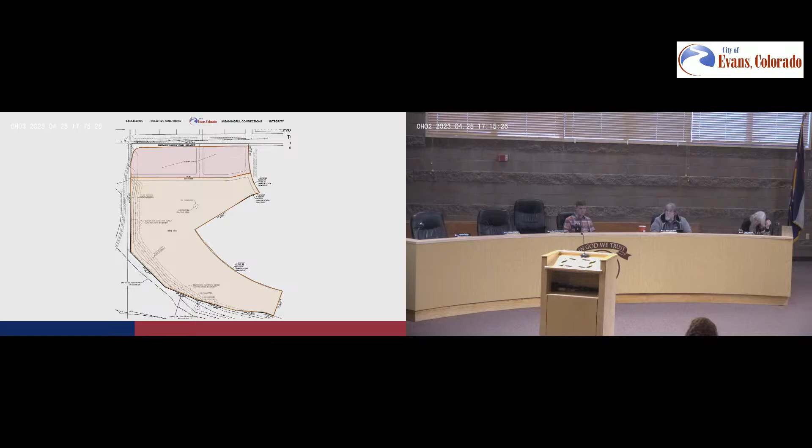The applicant has most recently completed a townhouse development in Greeley, just south of Center Place and west of Greeley West High School, which is shown in concept here to get an idea of some of the things that they have done.

There are 9 review criteria for a zoning amendment. The first one is that a need exists for the proposal. Obviously, or at least obviously to the landowner, the way it's zoned right now has not been working, and so they would like to change that. Let me get this other thing up here.

The next criteria, here I shortened them. The next criteria says the particular parcel of ground is indeed the correct site for the proposed development. The future land use map designates this area for commercial and residential urban neighborhood uses, so it's pretty mixed. As staff, we feel that this is in line with the proposed C3 and R3 uses.

The next two criteria go together, that there's an error in the original zoning or there have been significant changes to the area that warrant a change of zone. The original zoning does not match the market demand for development.

Also, residential development can better benefit from the direct access to the Ashcroft Draw Trail and the associated open space around it. Criteria number 5: adequate circulation exists and traffic movement would not be impeded by development.

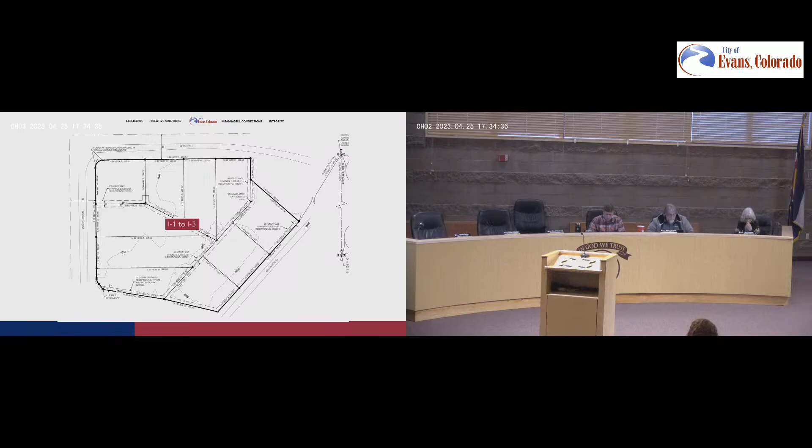Number 6 is that additional municipal service costs will not be incurred, which the city is not prepared to meet. The zoning amendment will not cause any additional municipal service costs to the city.

Number 7, there are minimal environmental impacts, or those impacts will be mitigated. The site plan and special use permit processes associated with this change of zone did in fact include a review and mitigation of environmental impacts, including the placement of a rain garden, enclosing the milk depackaging processing, and address a lot of those concerns. So there's not a concern with this change of zone.

Number 8, the proposal is consistent with the comprehensive plan.

The application furthers several principles. It helps our local businesses expand and gives them the best opportunity for long-term success, which is one of our comprehensive plan goals. Another goal says we want to value our agricultural resources and support those important industries into the future. This is an agricultural support service industry, so we would want to support that based on our master plan. And number 9, there is adequate waste and sewage disposal, water, schools, parks, and all those other things.

The site is served by municipal water and sanitary sewer. Stormwater will flow to a regional detention pond, and there are no impacts to schools or parks.

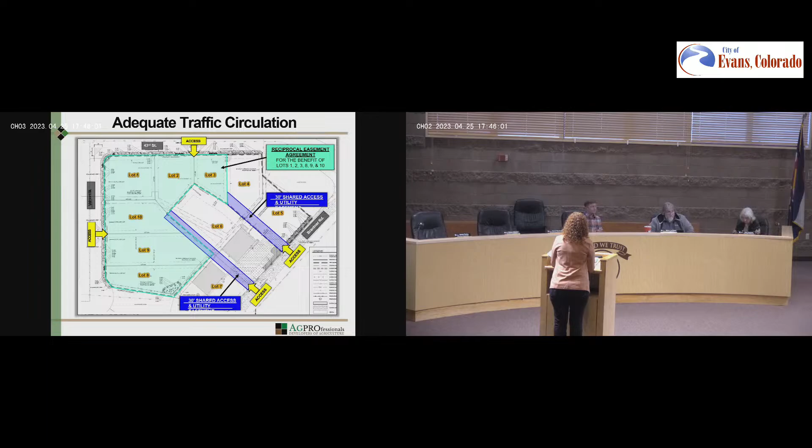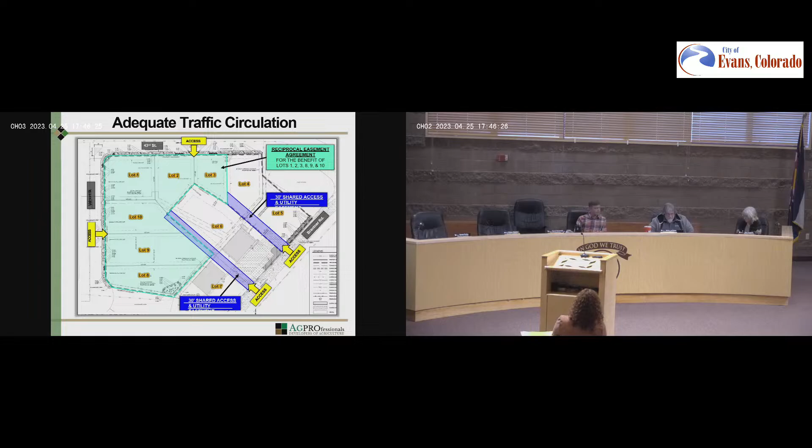We are ready for public comment. Is there anyone in the audience that would like to address this? No? Okay. Public testimony is now closed. There's nothing to rebut, so staff, any further questions or comments? No. Planning commissioners will now discuss this.

So upon hearing more about this and understanding it a little bit better, is it all right if I ask Angela a few more questions before we discuss it? Absolutely. So this seems like it's being called a recycling facility, but they're not really recycling.

They're not recycling according to the state's definition of recycling. They're recycling according to the City of Evans' definition, which is how the direction at the time was to do the special use permit. The City of Evans definition, which is in my presentation for the next item on the agenda, has that definition for you, and it's very broad. It says crushing, separating, taking something in and redistributing it. It's pretty broad, so I can see why previous administration directed the applicant that it was a recycling center. I also see that it's minor in nature and could see why someone might think it wasn't. I do see how it fits into that definition and why they were asked to do a special use permit application.

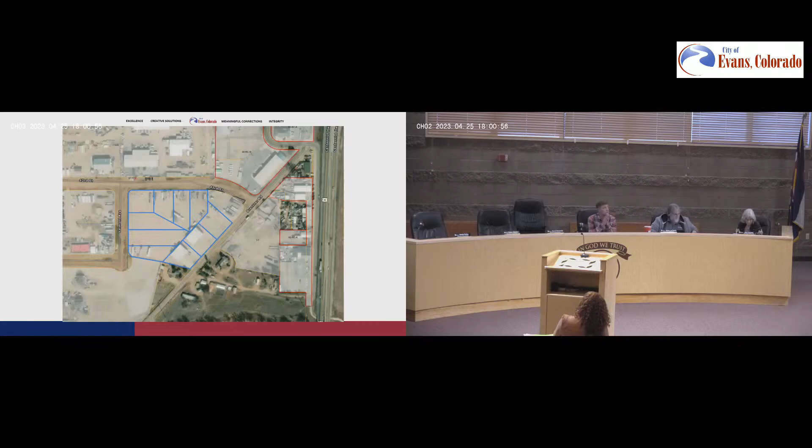For the office parking. So a recycling center, according to our code, means a use involving the collection and processing of recyclable materials for shipment or reuse - baling, compacting, flattening, grinding, crushing, mechanical sorting, shredding, melting, cleaning, and remanufacturing.

A recycling center is only allowed in the I3 zone district and requires a special use permit, which is why this request is before you today, as they were directed back in 2021.

There are 7 criteria for special approval of a special use permit, and some of their definitions are long, so I shortened them. The first one is health, safety, and welfare.

We believe the development standards in our review take this into account, such as MS4 providing for the health, making sure that all of any milk that doesn't make it into the truck gets dealt with properly for waste, and that those cartons are dealt with properly as well.

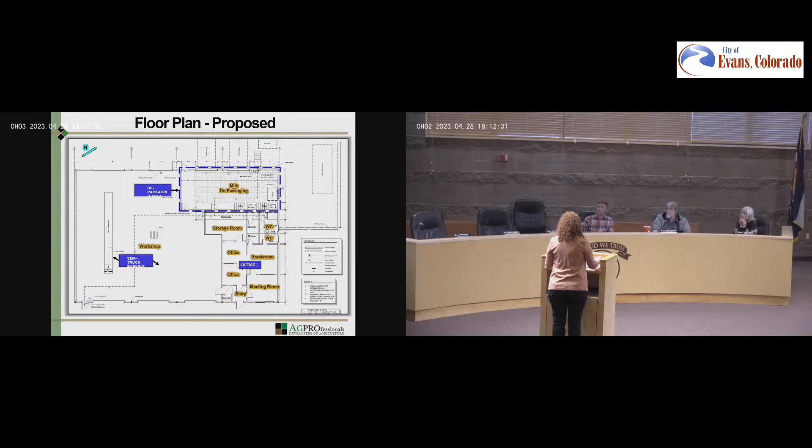And this is the upgrades that they would like to make. That includes 2 new roll-up doors, a man door, and a small loading dock. Trucks will pull up to the loading dock behind the building. The compactor and dumpster will be outside and screened with fencing. The compactor will be on a concrete pad to contain any spillage, and the dumpsters will be picked up when full.

For the use, the primary hours of operation are 9 a.m. to 4 p.m. Monday through Friday. There will be up to 3 employees on site at a given time. It is a family-run and family-staffed business.

For the truck parking and office, primary hours of operation are 8 a.m. to 5 p.m. Monday through Friday. As the building will primarily be used for parking, no full-time or on-site employees are expected for the truck parking spot.

There will be 6 weekly truck round trips for the depackaging use: 4 semi-trucks and 2 milk trucks, plus 3 daily employee vehicle round trips. For the truck parking, there may be up to 5 daily round trips. So given the low traffic volumes, no off-site roadway improvements are triggered.

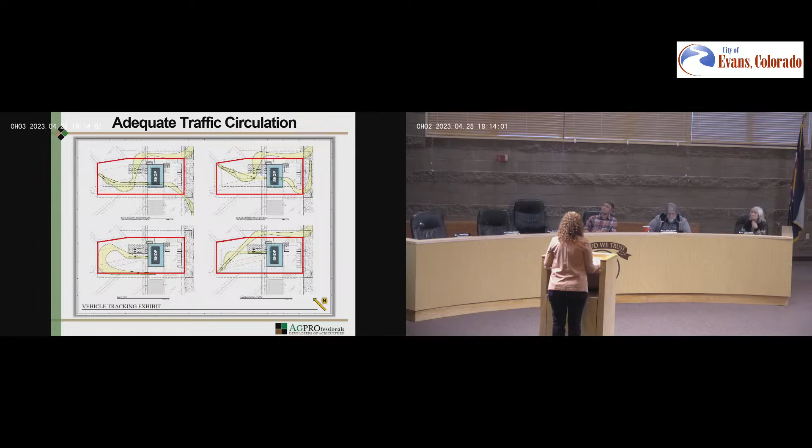We did evaluate the turning radius for semi-trucks and the layout of the permit boundary. With the minor replat, the lot will be expanded to fully contain the SUP. There are adequate utility services.

It is consistent with the comprehensive plan, as the comp plan recognizes the importance of agricultural support industries. The location of the site is key to its success as a central point between Denver and Wiggins, and they live just outside of town, so it's the perfect spot for them.

The request meets the approval criteria for an SUP. There are adequate provisions for health, safety, and welfare, and I'm happy to answer any questions you might have on that.

The conditions of approval are adequate to address the potential impacts. The site is physically suitable. The site plan complies with the applicable design standards, and we've gone through a pretty thorough redline review process prior to this hearing to ensure that.

Existing traffic volumes are staying the same. Paved off-street parking will be added, and the use is compatible with the other uses in the area. So we do believe that we meet the criteria for an SUP, and I would be happy to answer any questions.

Any questions? Okay, thank you.

This time we'll, if there's anyone in the audience that would like to make comment on this. There's no one here who wants to comment, so we will go ahead and close discussion.

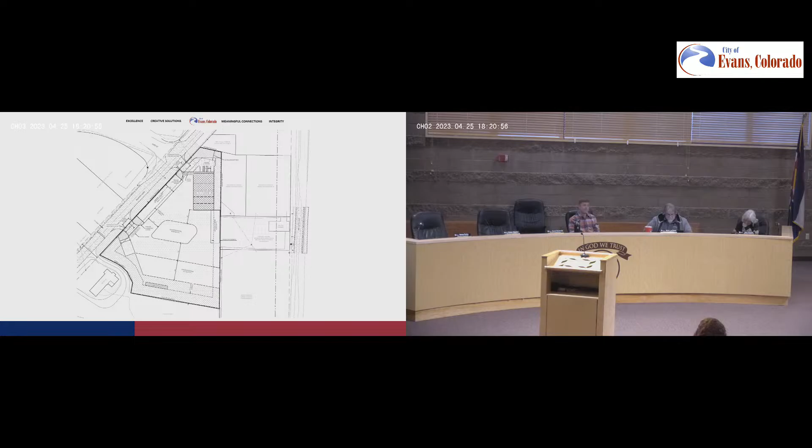Landscaping also comes with site plans. So the landscaping here has some trees and shrubs along Brantner, which is the only right of way that it faces. That's a little look at the landscaping.

Looking at the 7 criteria: for health, safety, and welfare, we do feel that the special use permit review and the development standards we have address health, safety, and welfare. There were some MS4 concerns on this property as well, and that's been addressed with a rain garden and by asking the applicants to enclose any tanks they may be storing, or at least provide secondary containment for those tanks in accordance with the state's MS4 regulations.

Number 2, benefit to the city. It's a benefit because going through this process helps us improve our MS4 and allows them to store, but also keeps our water a little cleaner. Number 3, consistent with plans and compatible with the surrounding area: there's outdoor storage on all of these lots in the industrial park, so it's very compatible.

Number 4, noise, traffic, or other concerns. They are operating already; they wanted to add the building and then exceed the outdoor storage. Staff didn't find any concerns with noise or traffic that needed to be mitigated through this, other than the normal development standards and the normal nuisance code exceedance limits for noise.

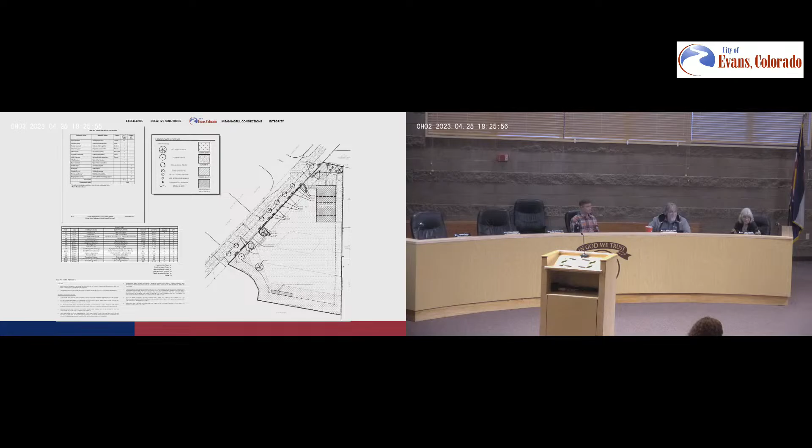Good evening, my name is Brian Spaeth. I currently reside at 33703 Siasconsa Road in Windsor, however I've been in the Greeley-Evans area since about 2007. I'm Kyle McConnell, I live at 1320 Brantner Road. I have the farm right next to this property.

We feel the proposal we submitted for this special use permit should be approved because it coincides with surrounding areas - it is in the industrial park, and obviously the farm across the way is doing the same thing. We feel upon approval and the improvements going into this property, it's going to drastically increase not only the aesthetics of the property, but of really the whole surrounding area as it is right now.

Commissioners, do you have any questions for the applicant? When you talk about trucks and things being stored out there, can you describe that to me a little bit better? Are we talking semis? Are we talking tankers? Washed tankers? Currently...

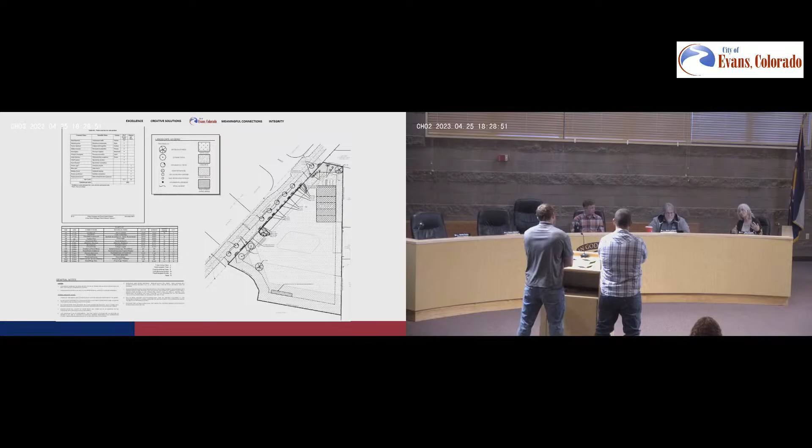So is this equipment that - no, I'm going to table that one for later, that's too confusing. Do you have an approximate volume, like number of pieces of equipment? I guess what I'm trying to get a sense of is, in an area I dealt with in the past, when you're bringing in equipment to be parked or stored in between service use, a lot of times it's not being washed, it's not being cleaned, it's leaking, there's rainwater, and my concern is especially with some of the volatiles, whether or not that rain garden is going to be adequate.

And if we have a way to kind of monitor that with the river being that close, because it's almost a direct flow from the parking lot into the river. So that was one of my questions, but I don't know that this is the place to address that.

That is a great engineering question for our engineers that review the MS4. Maybe she knows. Hi, we're not representing on the land use, but we did help with the engineering, so we did the drainage report and site plan, which is why I'm hanging out here.

The requirement when you're that close to a floodplain is you cannot do detention that close - that would violate those regulations, but you do have to meet MS4. So the rain garden is sized based on the state's urban design, urban drainage criteria, and that's how it gets designed.

It's kind of hard to tell on this, but the dots in the southern area there, that's native grass too. So the bottom of that rectangle is the actual filter strip, but everything else is graded towards that bottom filter strip and runs through a native grass area. So essentially the whole southern portion of it is the filter strip, and that's just put at the lowest point on site.

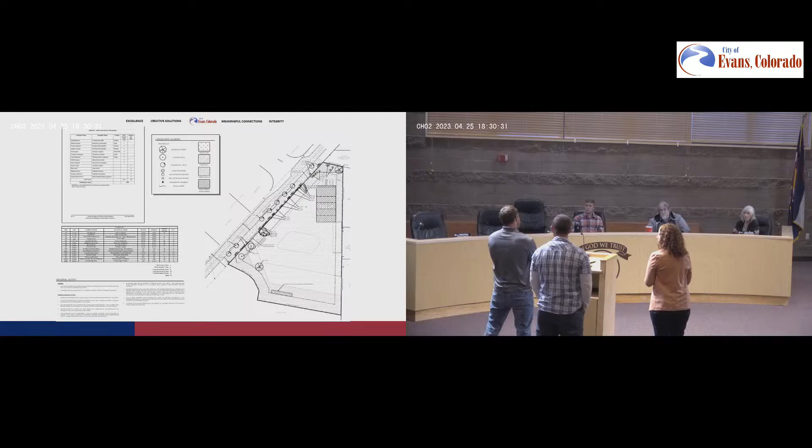And there won't be any flushing of trailers or anything like that? We're not doing a washout on the side kind of thing? Okay, all right, that's it, I had.

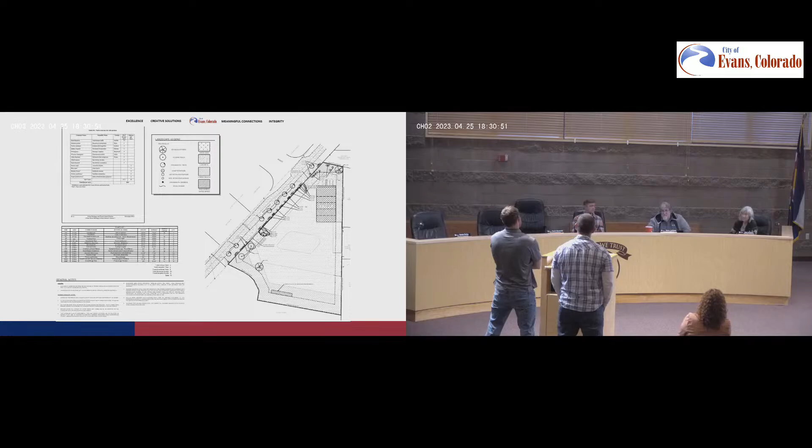No, thank you, I actually have a question. You said this will improve the aesthetics of the property. How specifically are you achieving that? I mean, it sounds like you're going to put a lot of equipment out there.

How is that aesthetically changing? We're going to landscape around the property. Unfortunately, the fence we have is falling down, so it's going to be a new fence, good-looking building. It's going to be better than it is.

When we bought the property, it was essentially a junkyard. It had tons of old cars, just metal everywhere. Looked like people had been dumping in there for years. So we've gotten rid of all of that over the last few years, trying to clean it up.

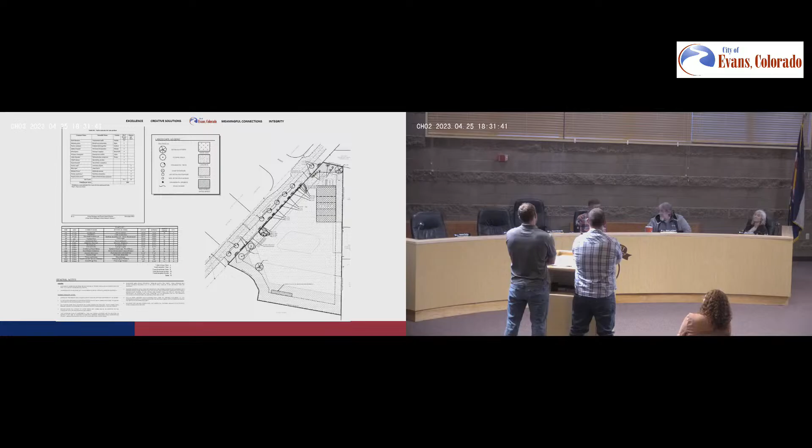Nothing further from us? Thank you. At this time, we'll entertain any public comment. There is none.

Staff, would you like to... commissioners, would you like to go ahead and discuss this amongst yourselves? Sure.

Their use isn't changing, they're just increasing the storage. I understand your concern and I appreciate that, I really do. Yeah, that location was really bad before, and they've really cleaned it up. Right, and there's still some questions as far as water quality, and that's not part of our discussion. However, it does impact my thoughts, and it sounds like I need to move further upstream to answer those questions. This isn't the place to answer those.

So it sounds like the main concern would be, is the rain garden enough? And that's a question for an environmental expert, to say is the rain garden doing everything that you'd hope it does. All they can say is that it's doing exactly what's been recommended, this is exactly how it's supposed to be engineered based on zoning. And we're just looking at a 20% increase in the lot, which isn't incredibly unreasonable, I think.

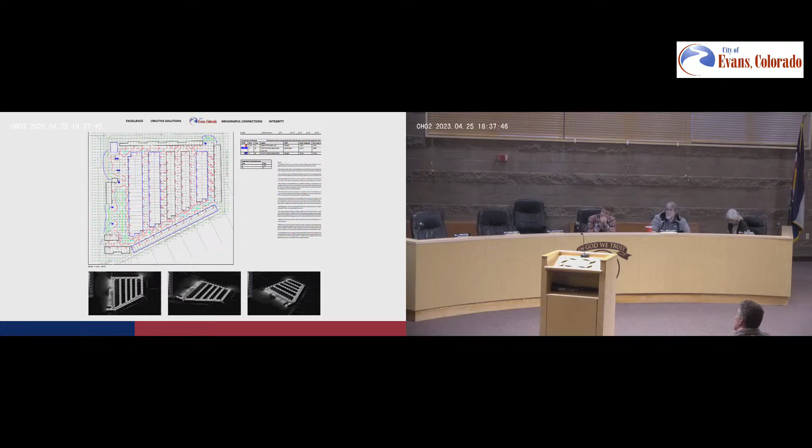The applicant did submit what's called a photometric plan, which shows how many foot candles of light are bleeding off the property, and this is a pretty impressive photometric - I've seen a lot of these, and this is impressive. They've got it almost to 0 all the way around. This is a simulation of what the facility would look like at night. You can see from this side angle there's almost no direct light leaking off of it. Of course you would see the light at the facility, but the light is not shining directly on any of the surrounding property owners or properties, which was important to staff given the proximity of residential to the site.

So we have those same, I went the wrong way. So there we go. There we go.

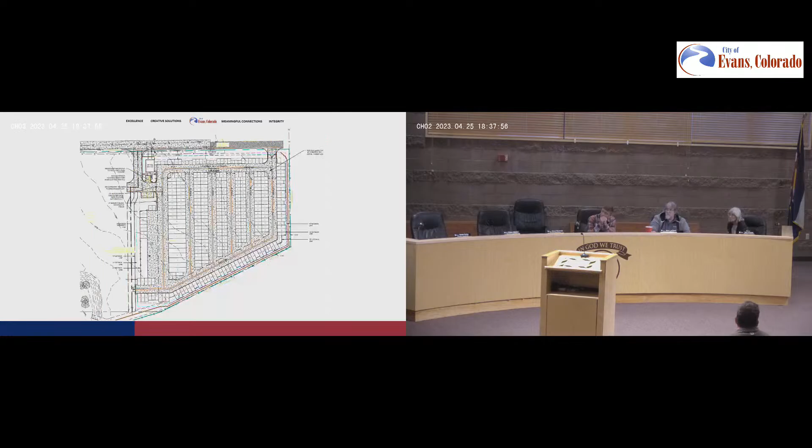So for our special use criteria for this site, we feel that the development standards and modifications, with the lighting, fencing, and landscaping to the residences, will help with the health, safety, and welfare effect on the neighborhood, benefit to the city. This is a commercial property, and getting it developed can't but help the city.

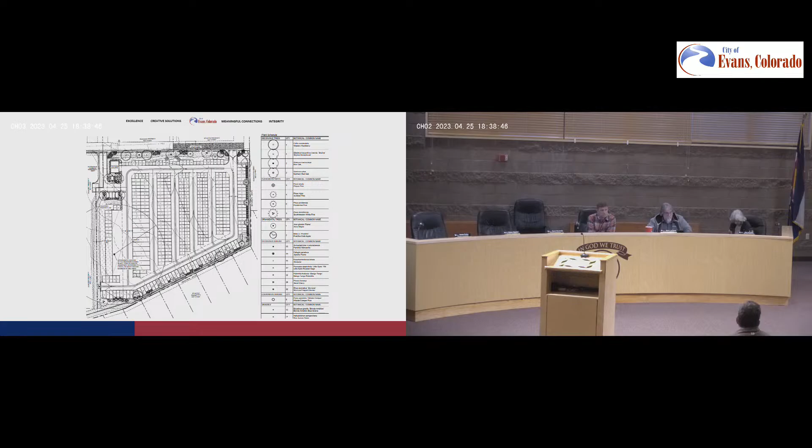The use of this property for mini storage in a commercial area, the reason it requires a special use permit in commercial areas is because it takes up that prime retail space in a commercial zone. So the city needs to really consider whether that's something they want in a commercial area.

This property is unique in that this lot, while it's commercial, has zero frontage on an arterial road. So we're preserving all of these lots up here for commercial right now - this is Ziggy's, this is a Walgreens, and the Naughty Pine Liquor and Domino's Pizza are going in right here, and they're approved. This is the Belfiore development, and they've been approved as well for a matching building right here.

So there's an access easement that provides all along through the Hunters Reserve Center, access to all properties. There's an access easement here in the original Hunters Reserve plat and right here. Now,

Because during the replat we'd like this lot to be accessed by right-of-way, we'll have to figure that out some way through the replatting process - whether we dedicate 30 feet right here so that instead of an easement, that's actual right-of-way, or we do it right here or here. Any of those options are acceptable to provide right-of-way access to the property.

The right-of-way access to the property doesn't necessarily have to be the main entrance. It can be via an access easement, as long as it's paved, and we are requiring, as one of the conditions of approval on the resolution, that if they end up using this and it's not the right-of-way, it stays just as the access easement, that the applicant obtain a maintenance agreement with that property owner. Because the property owner - we did receive a letter from them - just put in the brand new road right there, and they want to make sure there's a maintenance agreement in place if the use of the road is shared, which seems fair, and the city was already thinking about that.

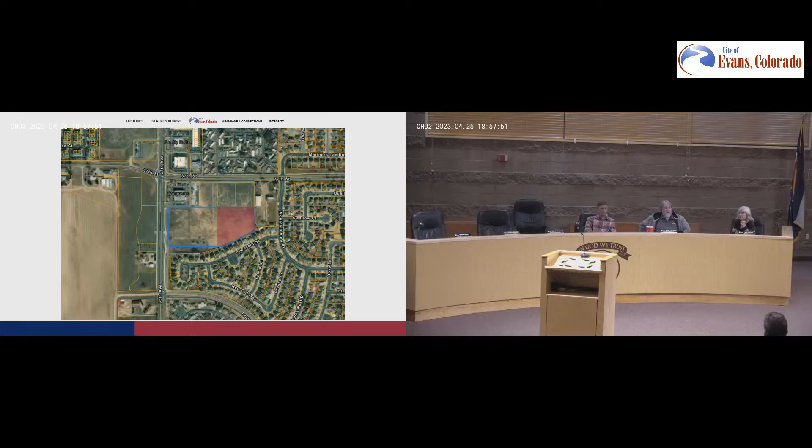Does the applicant have a presentation? The applicant is present and would be happy to answer any questions. Am I saying that wrong? I think you just say, is the applicant present? And then they come up. Is the applicant present? I'm going to relook through the script.

Good evening, Planning and Zoning Commissioners. I appreciate your time tonight. My name is Jason Sherrill with Landmark. We're actually traditionally a home builder. We did some home building here in Evans in the early 2000s, so it's been a long time since we've been in this building, but we appreciate the opportunity to be back. We've owned the property for a number of years, so we're looking forward to improving the property and maturing it per our plan. I don't have any additional information. Staff did an excellent job, so you guys understand the project and the scope of what we intend to do.

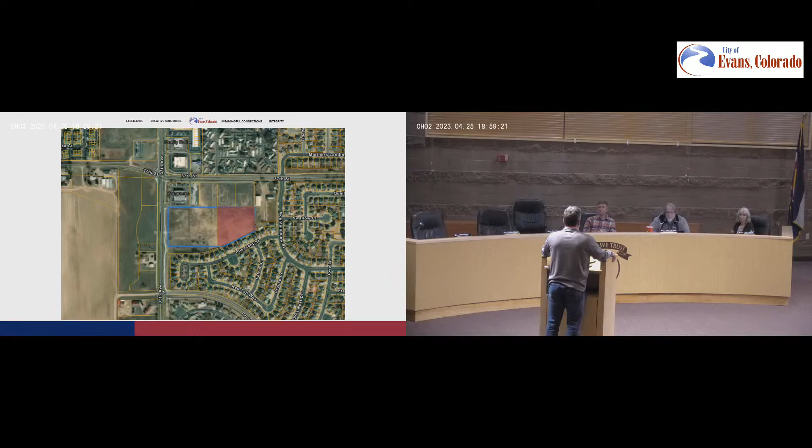I can address a couple of the questions I heard, if you'd like. As far as the right-of-way issue, we've developed over 30 years, multiple properties in northern Colorado, and a lot of our properties have access easements and not right-of-ways. As a home builder, we traditionally access right-of-ways, but within our projects we do private drives. It allows us a lot more flexibility with our projects, and the granted access is through an access easement, which is what we have here. So we do have an access easement. In my 30 years of developing properties, we've never had any issues with restrictions on the streets we've developed with access easements, so we're still very confident that's a reliable access point.

As far as the right-of-way, that's a tough one for us because we don't control the property that would be required to establish a right-of-way, so really we can't commit to any kind of right-of-way. We're very confident the access easement will provide dedicated access for our potential users over the years. So that's our position. As far as landscaping, we're certainly willing to meet the code. We often develop projects through the winters, and there's either some form of escrow agreement or letter of credit, as staff has described, and that's the traditional way to protect that the landscape will eventually be installed.

We prefer to get it installed prior to CO, but it really becomes dependent upon the weather. So if the weather allows, perfect. It's our preference. Last thing we want to do is have to worry about coming back. We want to get it done when we're on the project, completing the property.

As far as drainage, we have a civil engineer that prepared the drainage study and the grading plan. My suggestion, which I'm sure staff would echo, is that as we work through land use approval, we'll submit final compliance drawings, staff will give recommendations, we'll resubmit, and eventually submit a set of drawings that staff approves. However you want to meter that, we understand, but traditionally final compliance happens after approval of the land use. Whatever it needs to be, we're willing to comply.

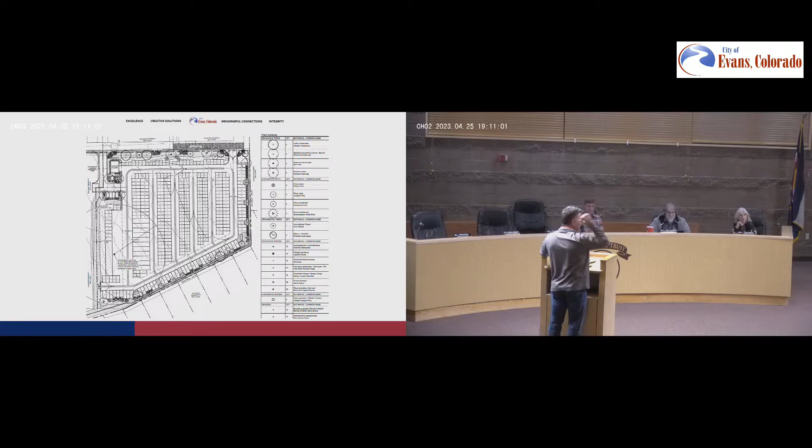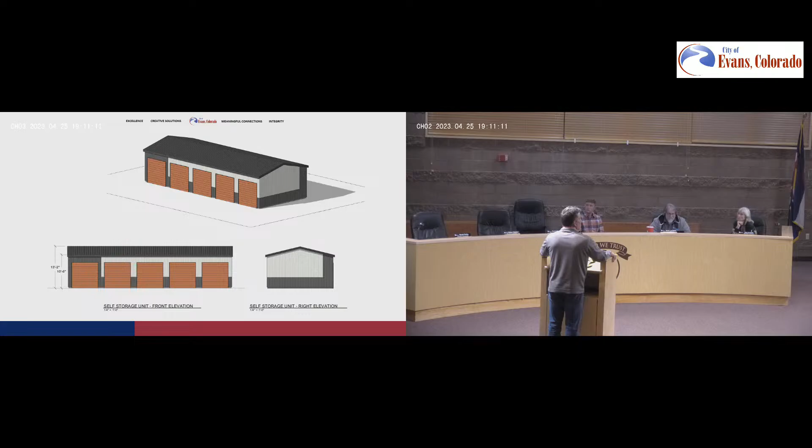That's all the questions I have. I have a question on what appears to be the southeast border, the angular border. Is there going to be any sort of wall there separating the facility from the neighborhood? There'll be a fence. There is some fencing there now, and I can't remember if we're putting new fencing up. Is it going to be taller than normal, more than a 6-foot fence, or is it going to match the neighborhood? I apologize, I'm not sure. I don't think it really shows here, but I don't know the answer to that question, though I can certainly get it.

And then to the west, that's where the whole project will be fenced.

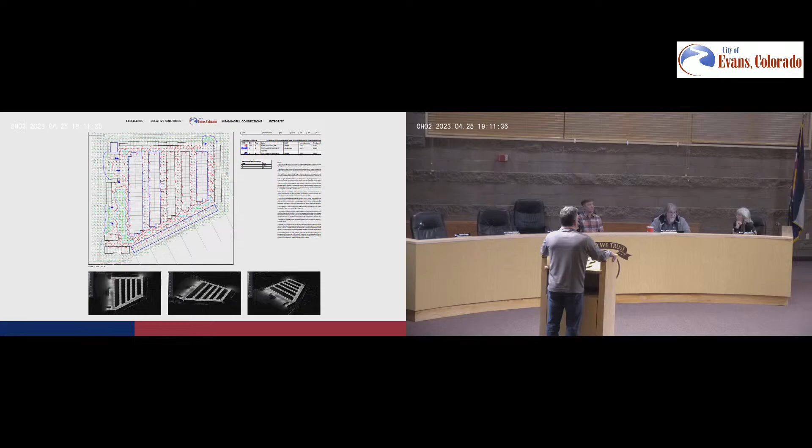West of the facility, that's where the new development is, isn't it? It's not farmland anymore. It will be developed west of 35th. It's being developed right now—they broke ground there a few weeks ago. Liberty Draw, that first phase that was already approved, is going in right here. They have an emergency access at Prairie View that will eventually curve up around that property we already discussed this evening, making a semicircle, or a quarter circle. This piece right here is not part of Liberty Draw, but all of this is.

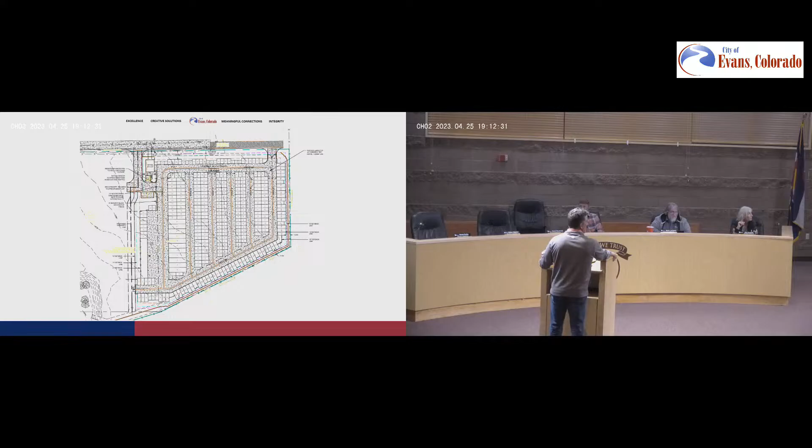Can you zoom in on the landscape plan? I think I'm recalling now. There's a way to do it in PowerPoint—control and mouse scroll.

To the east, we're installing the fencing because that's vacant ground. Those residents do have fencing, but if I recall in our landscape plan, there's our fencing, then a buffer yard, then their fence. But will your fencing be solid, or chain link? Solid.

I don't know if you can see it, but that's as far as we could get it. I'm looking through—what is that little strip there, between the blue part? Below the blue line—that's the detention pond there? Yes.

Will that have some open space around it though? As far as Hunter's Reserve, when the whole development was made, there's a certain portion reserved as open space. Commercial's a little different—each property could be covered 85%, but then you look at the whole site for drainage design, which is why there's this detention area. I think this was originally an outlot. This development also included all of this residential development when it was first made, so these properties all drain to this detention pond, and now these properties being developed will also drain into it. The original drainage report had to show that this entire drainage basin could support it.

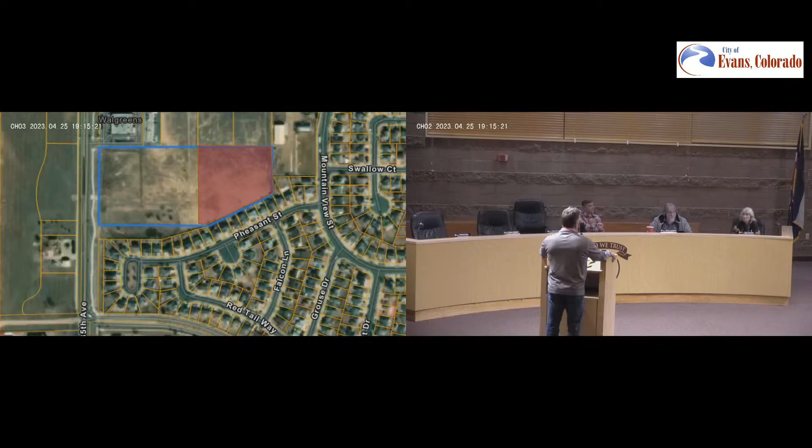Any further questions from commissioners? All right, thank you. I don't know whether I should say this, but does anybody in the audience want to make a statement? No questions? Thank you. At this time, public comment will be closed.

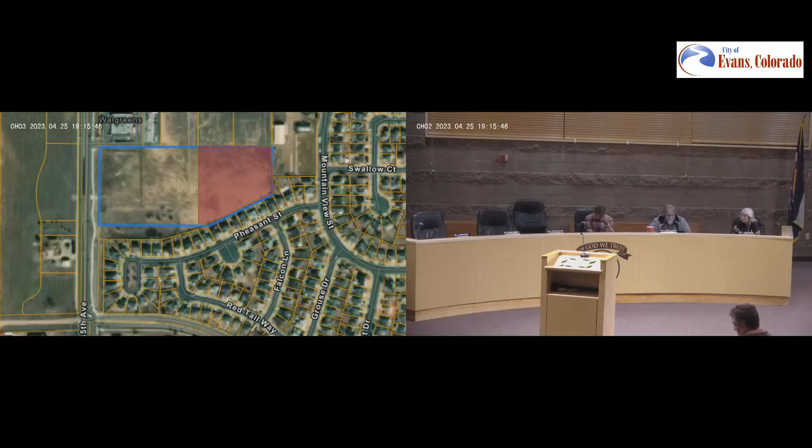And staff, any further questions or comments?

I would just comment that you look at the resolution and make sure you're okay with the way I've worded those conditions. They would be right up from there. PrimeGov doesn't do formatting super great, but if you go up just a little bit further, the resolution has the conditions similar to this, just formatted better.

Do we have a copy of the resolution? That's okay. Yeah, there we go. So I've worded it so it says prior to recording this special use permit site plan, the replat has to be approved and recorded. That's pretty standard, that before you put a special use permit on something, you have to make the lot. And then second, prior to recording the plan, those development standards be placed on the plan. Those are pretty standard, but you're also welcome.

It's in your purview to always know that you can change any of those development standards. If you go down to number 2, keep scrolling. So it says prior to construction, an executed road maintenance agreement for the proportional maintenance of Hunter's Reserve private access easements between the affected property owners shall be submitted. That was just our way of making sure the other property owners who own the land with the improved road have their interests taken care of.